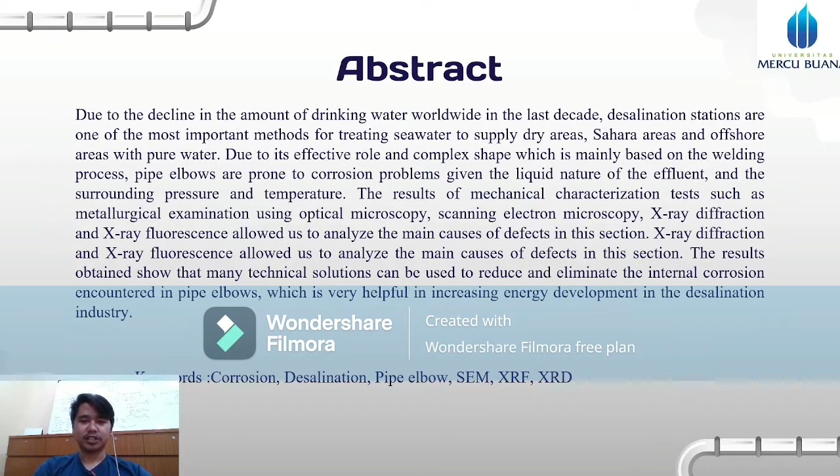A long time ago, water wealth played a major role in the emergence of many civilizations and wars between human nations. And recently, the water crisis has become a serious problem because of the scarcity and increased demand for clean water, and another aspect is scarcity due to thermal emission and water pollution activities. For this reason, many countries have adopted the seawater desalination methodology as a solution to the problem of water shortage.

The solid-liquid interaction in desalination industry components causes chemical reactions at the elbow, which represents a critical zone in the piping system. The process of water treatment and transportation depends on the piping system, especially the elbow, which is an important part. Carbon steel is considered the best material for the pipe, making use of its mechanical properties and low cost, but with relatively low corrosion resistance.

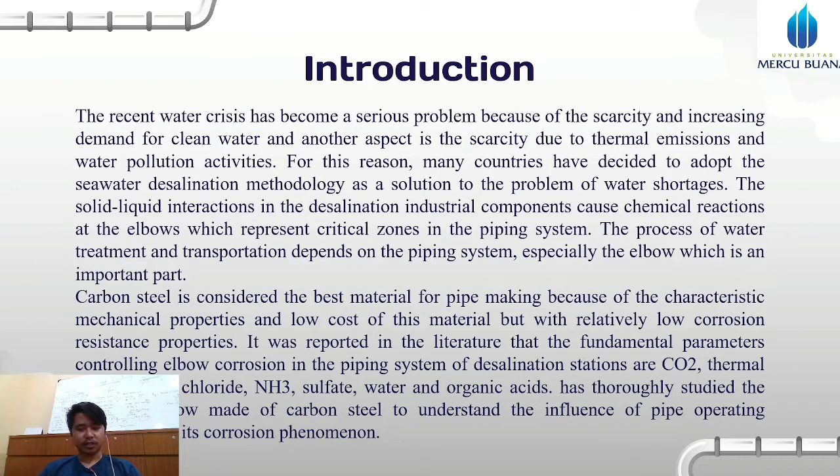It was reported in the literature that the fundamental parameters controlling elbow corrosion in the piping system of the desalination station are CO2, thermal effect, chloride, sulfate, water, and organic acid. Studies have examined corrosion of elbows made of carbon steel to understand the influence of piping operating conditions and the corrosion phenomenon.

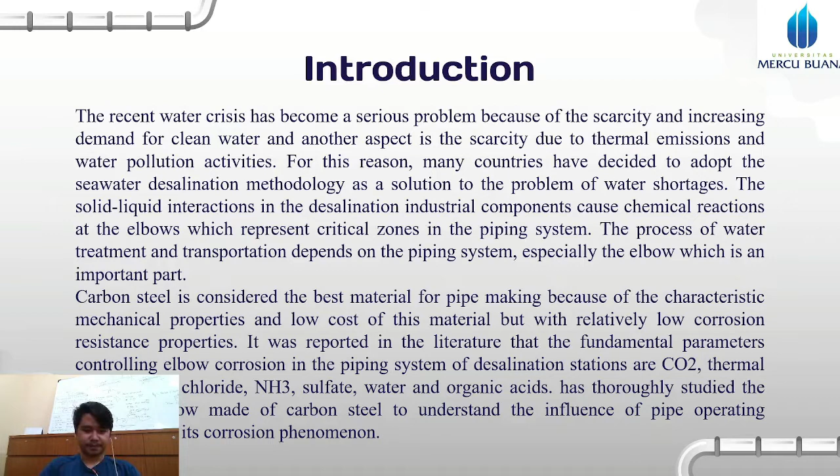On the experimental procedure, material test specimens. In our study, we prepared samples from a failed carbon steel elbow. These corroded elbow samples were taken from a desalination plant in Chlef, Algeria.

Figure number 1 shows a schematic presentation of the solution process and the location of the failed elbow. The liquid solution passes through the elbow in a vertical direction. Yes, in the vertical direction here, as shown in the figure. There are two elbows, here and here. Two elbows.

Figure number 2 shows an external view and corrosion positions in three regions of the elbow pipe during service operation. Internally, the inlet pressure is around 3.5 to 4 bars, while the outlet pressure reaches only up to 1 bar. The flowing temperature reaches about 85 degrees Celsius. The corroded area is in two positions, 3 o'clock and 9 o'clock of the elbow.

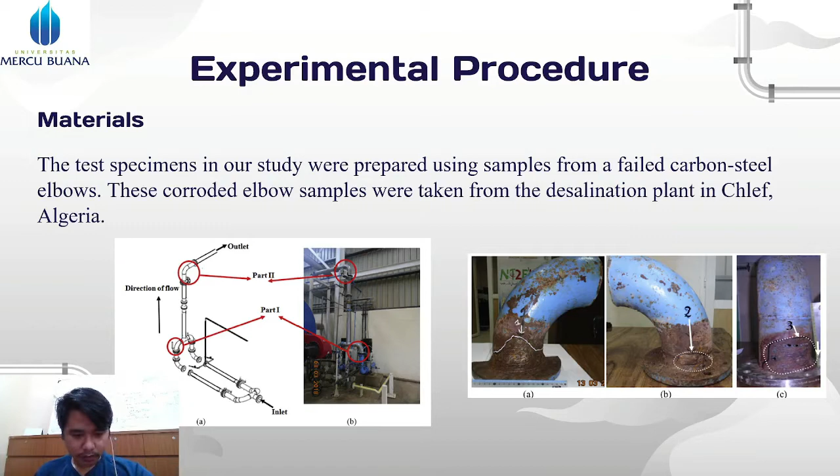This is a visual observation according to the desalination plant operation system for carbon steel. The carbon steel pipe should be inspected at locations that have the highest interaction with sewage, especially in the critical zone surrounding the valve.

Indeed, elbow corrosion takes the form of holes and grooves that extend in the same direction as the fluid flow. This is caused by attack of the flowing fluid and the opening of the valve, and these two factors contributed greatly to eroding the thickness of the pipe.

On figure number 1, we used it to find out the reason for the erosion corrosion during the experiment. The corrosion position of this sample we analyzed by degree. Figure number 2 is here.

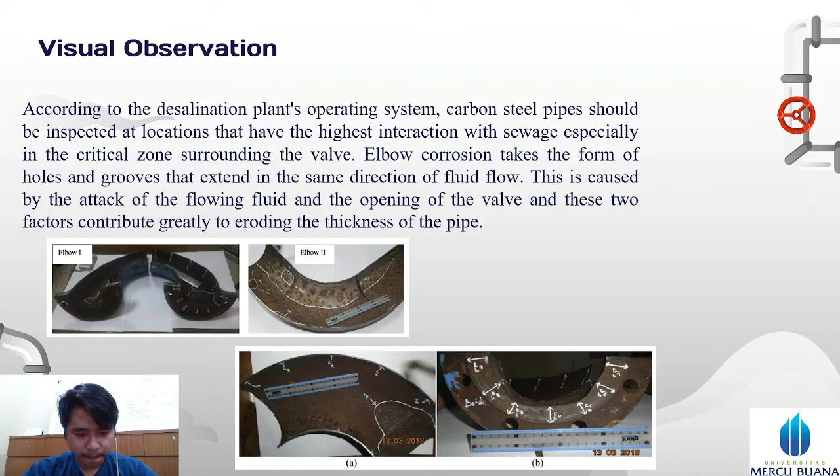Chemical composition and metallurgy examination. Knowing the mechanical behavior of the piping system is necessary to predict and avoid corrosion problems. The chemical composition of the carbon steel corroded elbow was studied via microstructural and chemical properties investigation, including the tensile and hardness measurement tests.

MEA is considered so far as very effective, and the chemical substance that can be used to minimize the generation of intermediate molecules. Among the advantages of the MEA substance is the ability to reduce pollution, resulting from the presence of sulfur components in emitted CO2.

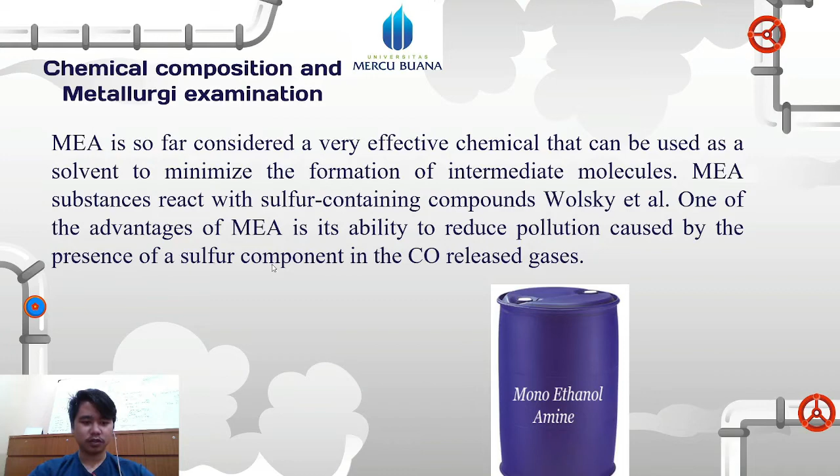One of the advantages of MEA here is the ability to reduce pollution by the presence of a sulfur component in CO2 release gases. And for the result, erosion corrosion in the pipe is still a complicated problem due to its impact on changing the structural and mechanical properties of important components in the infrastructure of the desalination industry.

Understanding the behavior of the corrosive elbow is greatly associated with the fluid-solid interaction inside the pipe. In the study, samples from different zones of the corrosive elbow were used to analyze the corrosion behavior of the surface.

A series of experiments were conducted to identify the cause of the corrosion erosion phenomenon. Along the corrosive elbow, the obtained results for different zones of the elbow are listed in this section. In particular, our attempt in this study is to determine if one or more factors have helped in evolving and propagating corrosion in the test elbow.

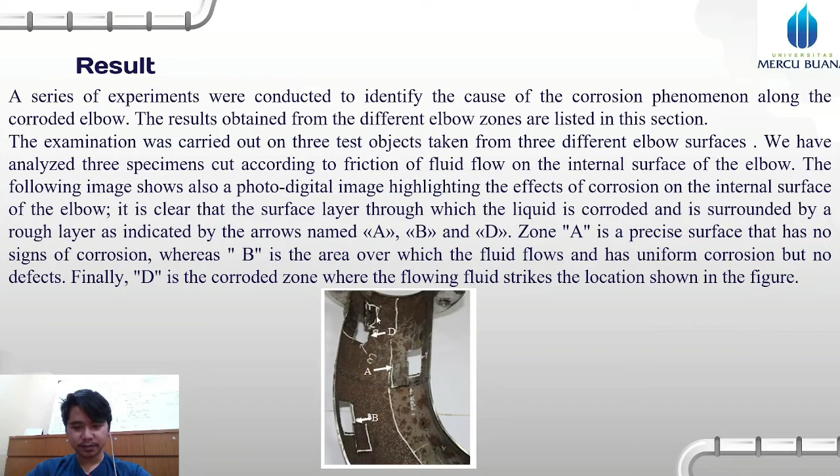Zone A is a proper surface which does not have signs of corrosion. At point B, in this area where the fluid passes, there is uniform corrosion but without defects. And finally, D is the corrosion zone where the flowing fluid attacks the indicated location in this image.